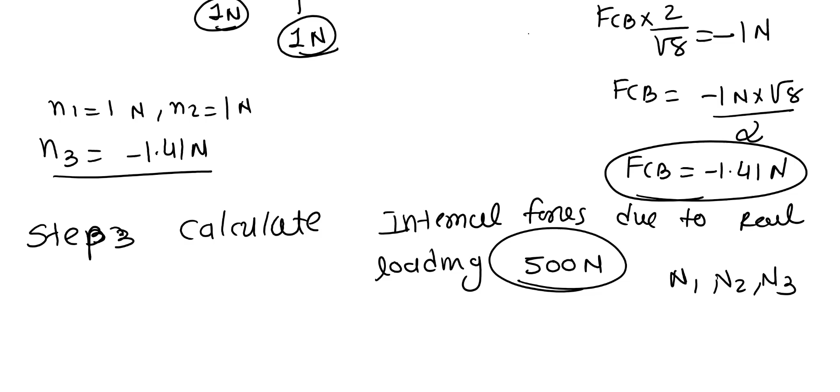Continuing from the previous video, where we applied the virtual unit load of 1 Newton and found the internal forces n1, n2 and small n3. Now we need to calculate the same thing for the real loading. Let me draw the first one, the virtual one that we calculated.

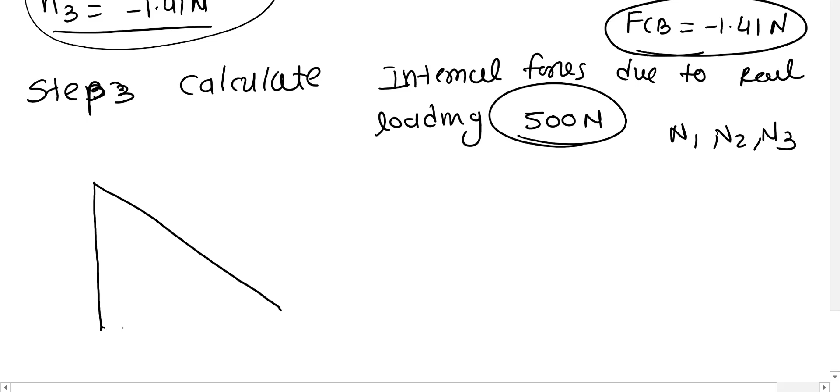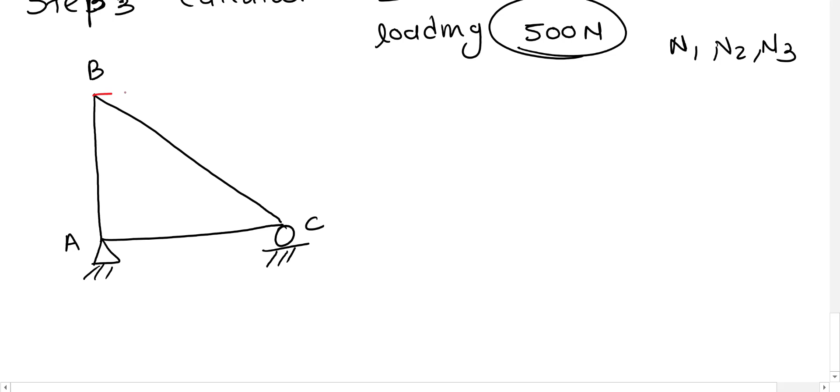We have this pin support, roller supports, and we have point A, point C and point B, and we apply this virtual load of 1 Newton. Due to this virtual load we found these three forces: 1 Newton here, these are internal axial forces, 1 Newton here, and we found minus 1.41 Newton for this member.

So now let me draw the new real one, that is for step number 3. We have the pin supports, the roller supports, and the same names A, C and B. Now instead of 1 Newton we have the real load of 500 Newton. By looking at this we can see the 1 Newton is changing to 500 Newton, so respectively all the internal loads would be multiplied by 500.

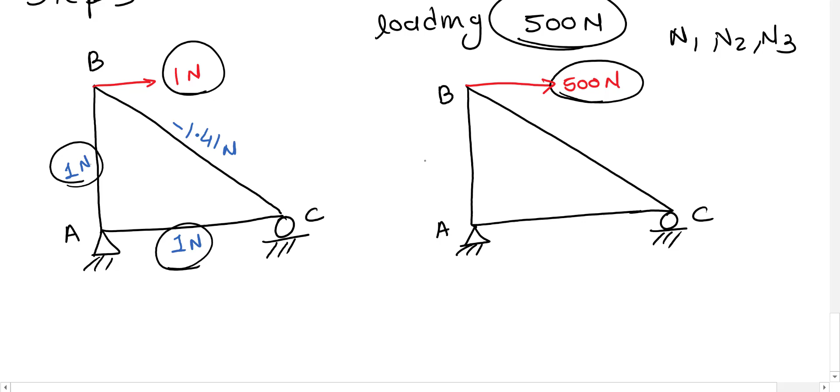So here if I multiply 1 Newton, I would have a 500 Newton internal axial force. Similarly here we have 500 Newton internal axial force, and here minus 1.41 times 500 would give us minus 707 Newton, right? So it's just amplification. It does not apply to all examples, but here fortunately we can multiply by 500.

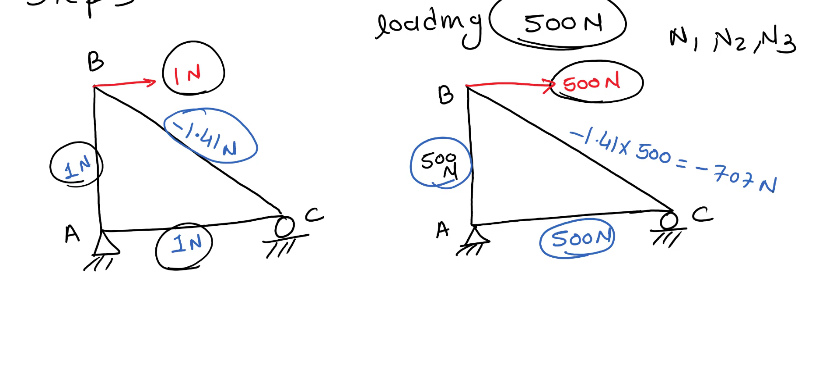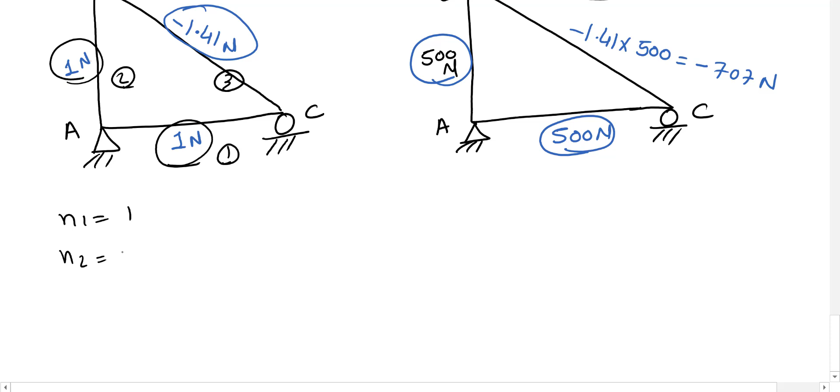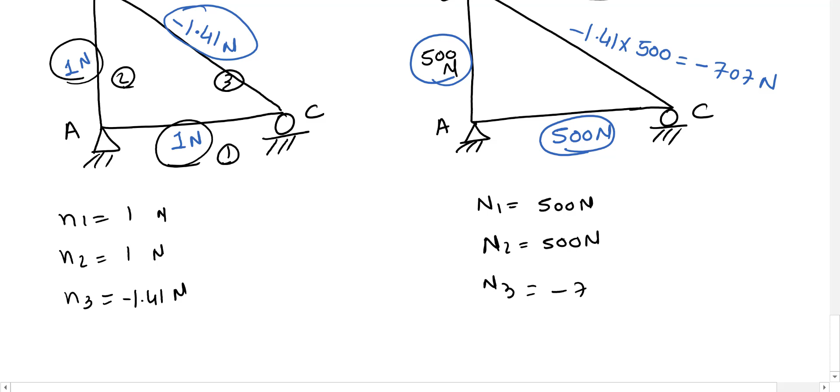So here let's number them 1, 2 and 3. I can say n1 equals 1, n2 equals 1, small n3, the virtual one, minus 1.41 Newtons. And similarly capital N1 equals 500 Newtons, N2 equals 500 Newtons, and N3 equals minus 707 Newtons.

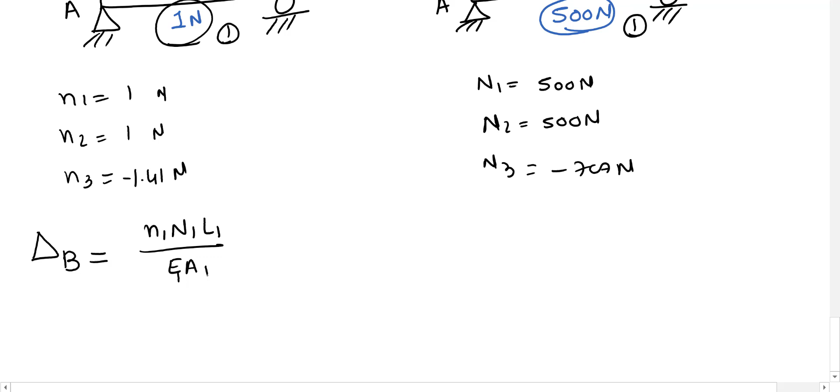So if I know all the small n and capital N values, I can find the deflection at point B equal to small n1 capital N1 L1 over E1 A1 plus small n2 capital N2 L2 over E2 A2, and we have 3 members, so we have the third one written here. Now here we have small n1, small n2, small n3.

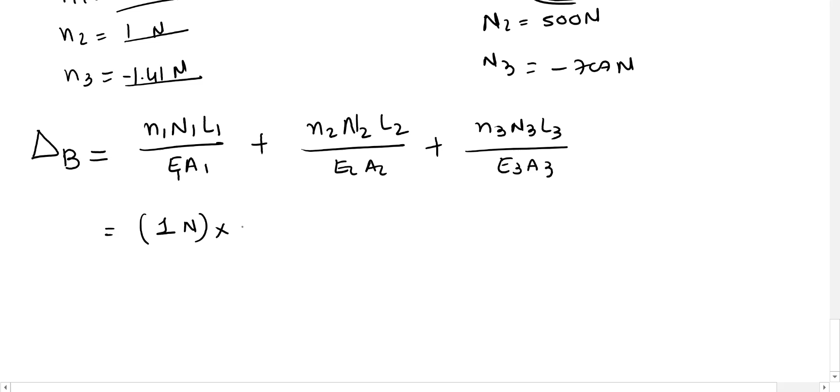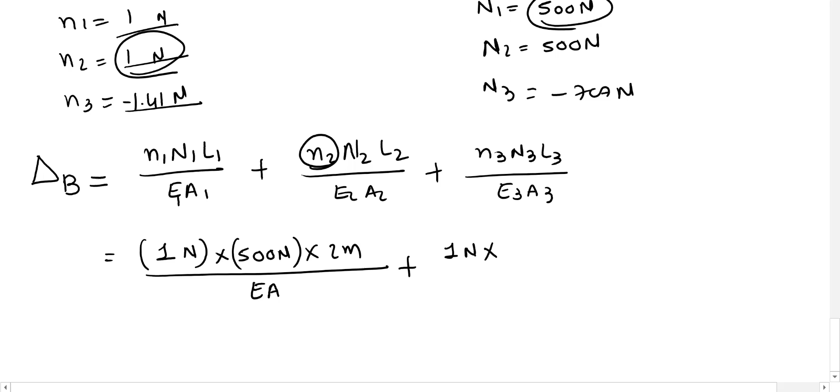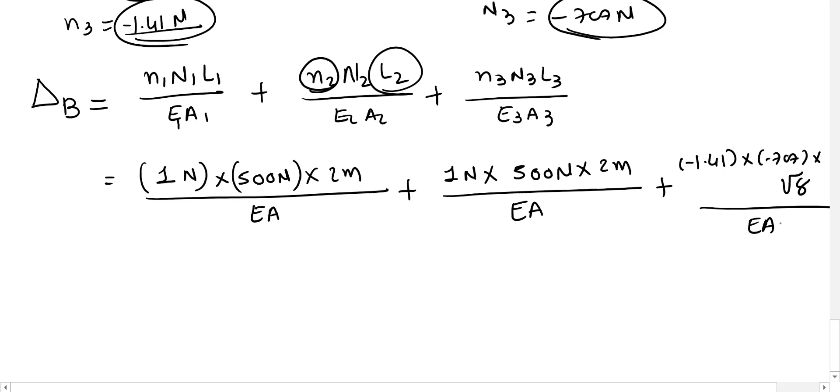So small n1 is 1 Newton, capital N1 is 500 Newtons, and the length L1 is 2 meters for member 1, over EA, which is constant. n2 is 1 Newton, capital N2 is 500 Newtons, and L2 for the second member is 2 meters over EA, plus n3 is minus 1.41 times minus 707 times square root 8, which is L3, over EA. The length of this one is square root 8, explained in the previous video.

If you simplify, this gives you 1000 over EA, plus this also gives you 1000 over EA, plus this one gives you 2819.6 over EA, and if you sum them up you get 4819.6 over EA. So that's delta B due to this 500 Newton load.

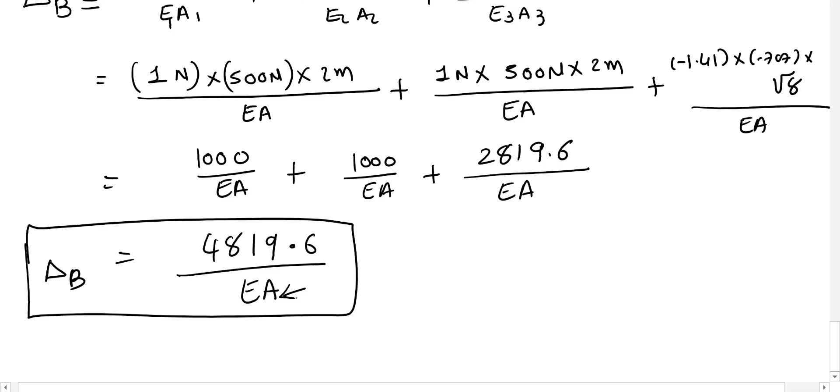So if you know the value of EA you will get the answer in meters, and then you can convert into millimeters. Thank you very much.